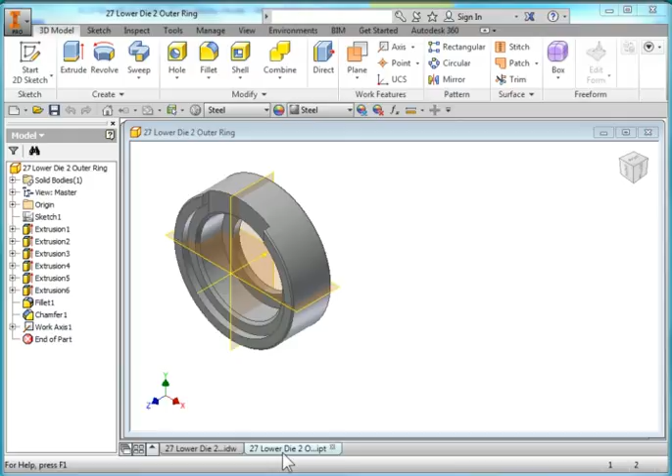In this video, I'm going to show you how to make this part and this drawing. It's part 27, lower die 2 outer ring, part of the button maker project, project 8.1. The part is shown dimensioned on page 18 of that document.

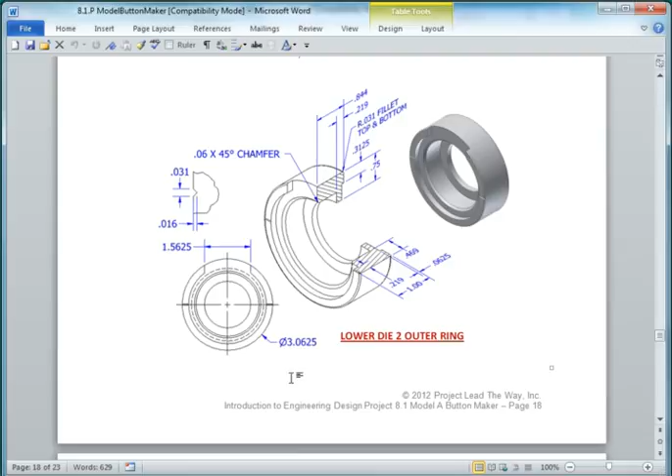I'm going to start out by creating a new part. Add a new sketch on the XY plane. Create a circle at the origin, and make that a diameter of 3.063.

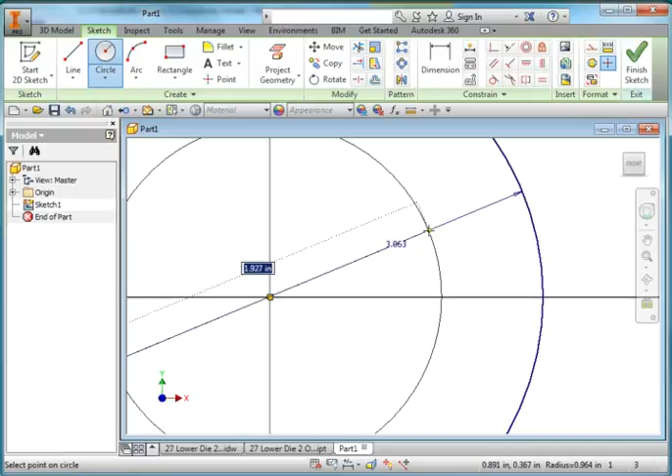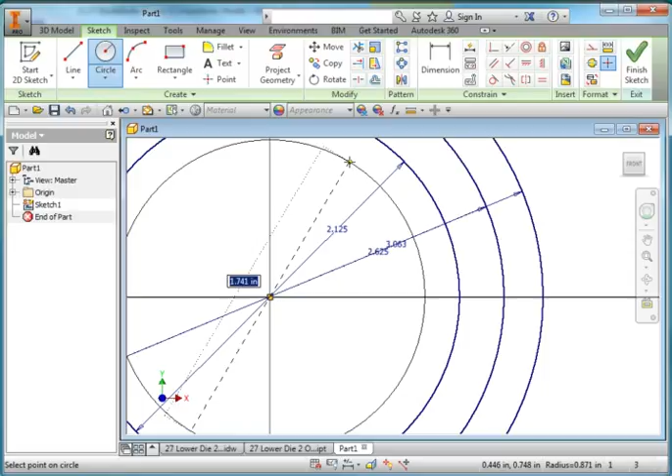Another circle also at the origin, with a diameter of 2.625. Two more at 2.125 and 1.563.

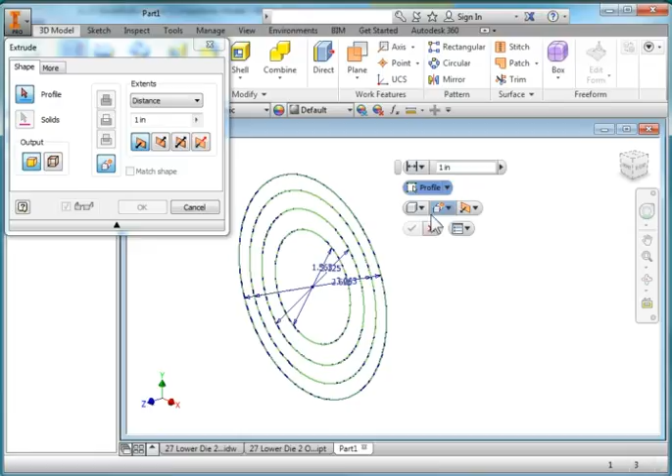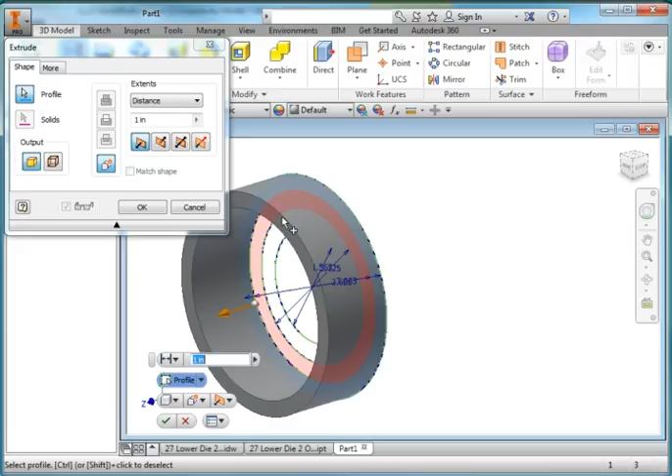I'm going to extrude out a distance of 1 inch. I'm going in the reverse direction, and I'm going to choose all these profiles. As a profile, I'm going to select all the diameters other than the middle one, and go out 1 inch in the reverse direction so I can keep the sketch on this top surface. Hit OK.

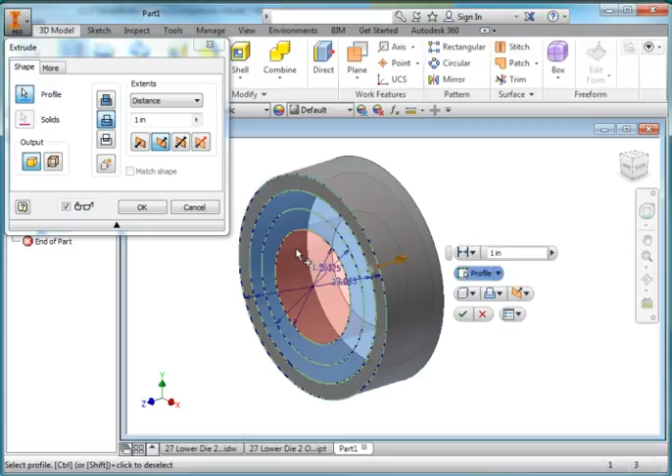I'm going to go to this extrusion, and change the sketch to turn the visibility back on. I'm going to extrude out, reverse direction, remove material, choosing these two inner profiles, and go in 0.156.

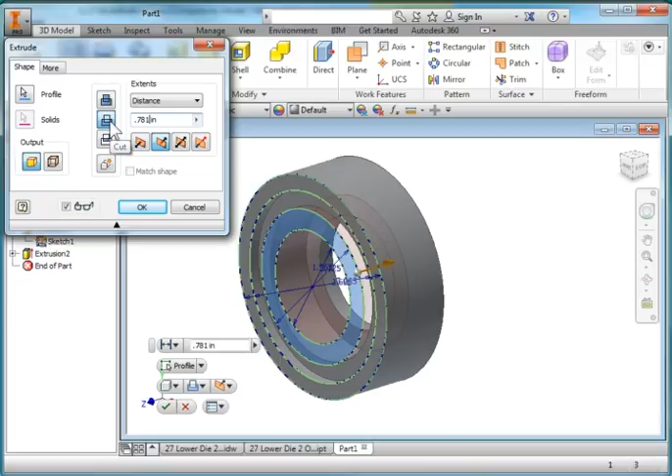One more time, I'm going to extrude by just choosing this inner diameter, remove material, and go in 0.781 inches. I'm going to come back to this sketch and turn off the visibility.

I'm going to go to my chamfer tool, and set the chamfer to 0.06, and choose this edge here.

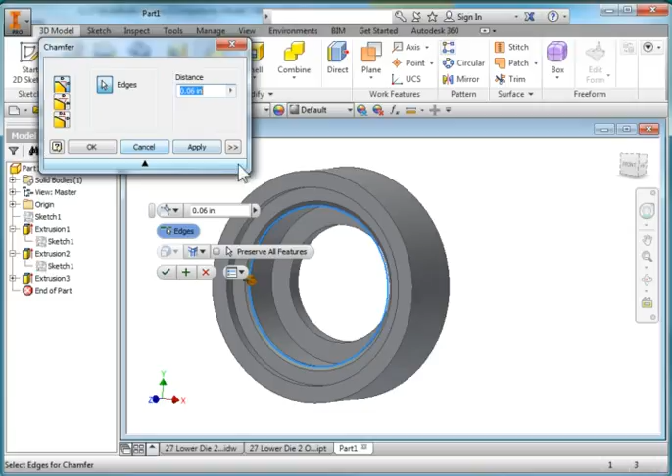I'm going to turn the part around and create a new sketch on this surface. Draw a circle from the origin and make that diameter 2.438.

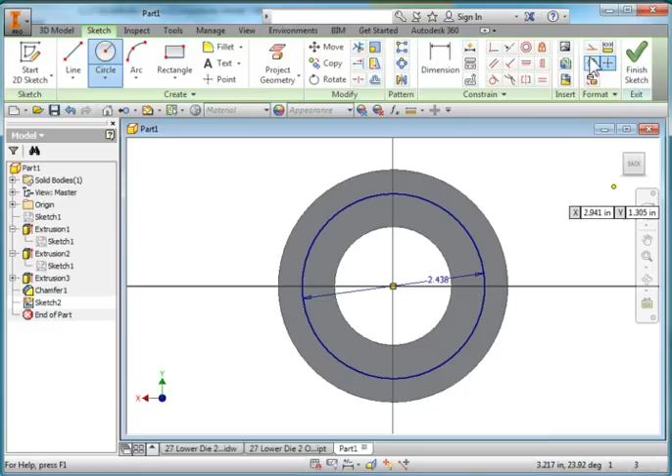I'm going to extrude, remove material, to a depth of 0.063.

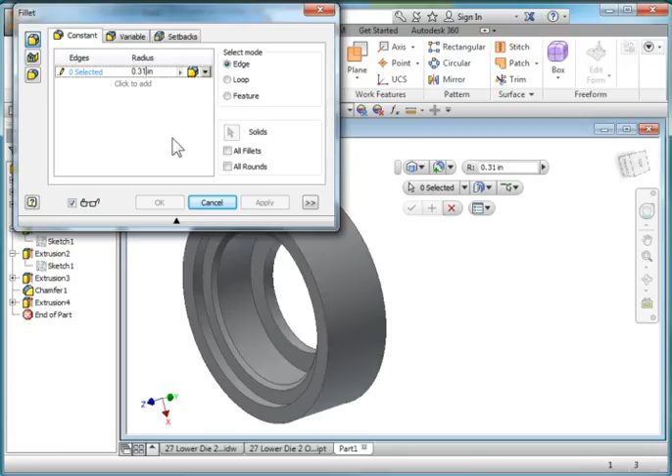I'm going to go to my fillet tool, and add a fillet of 0.031, at that edge and that edge, 0.031.

Going to go to my front direction. I'm going to open up my origin folder, and look for that plane. In this case, it's the XZ plane. I'm going to create a sketch on that plane.

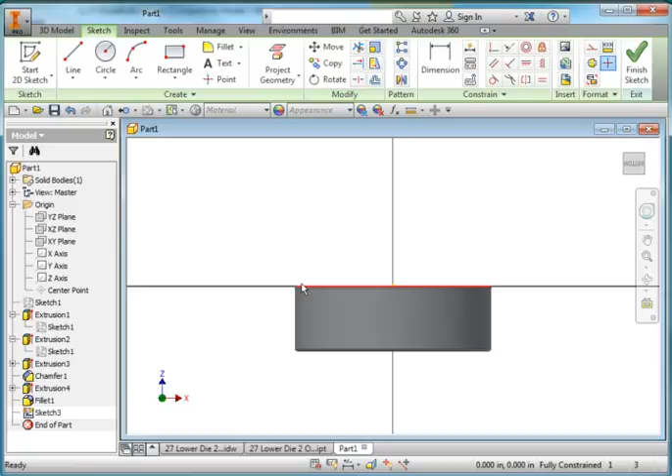I'm going to turn on Slice Graphics. I'm going to zoom in. I'm going to turn on Construction Geometry.

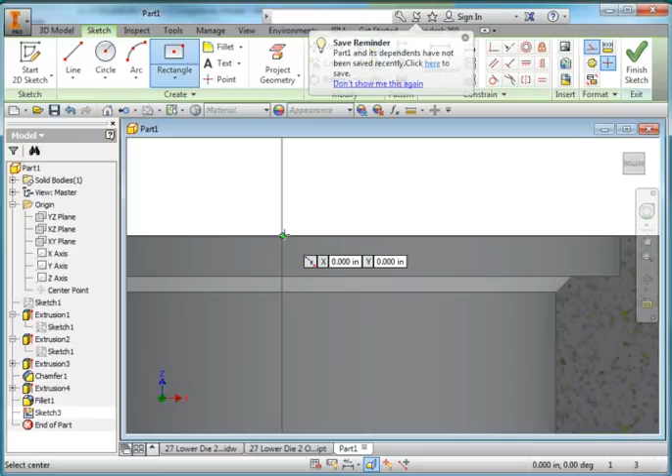Going to create a centered rectangle at that point and make the sides 0.031 tab, and this is 0.016 times 2.

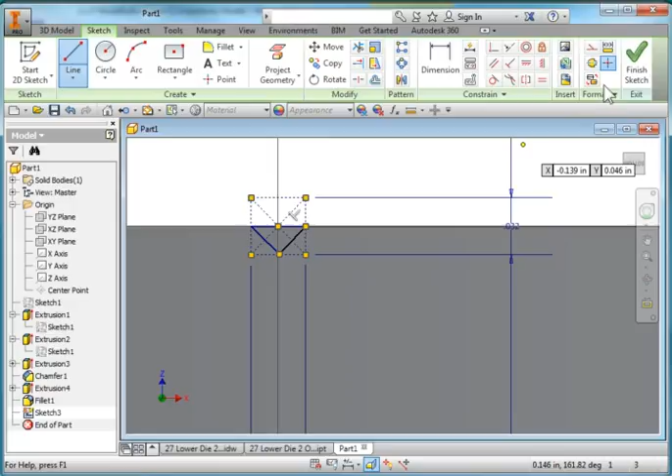I'm going to turn off Construction Geometry. I'm going to draw real geometry from that point to there, and then close the shape. I'm going to extrude in both directions, all the way, and remove material. Hit OK. If you zoom in, you can see the notch I just created.

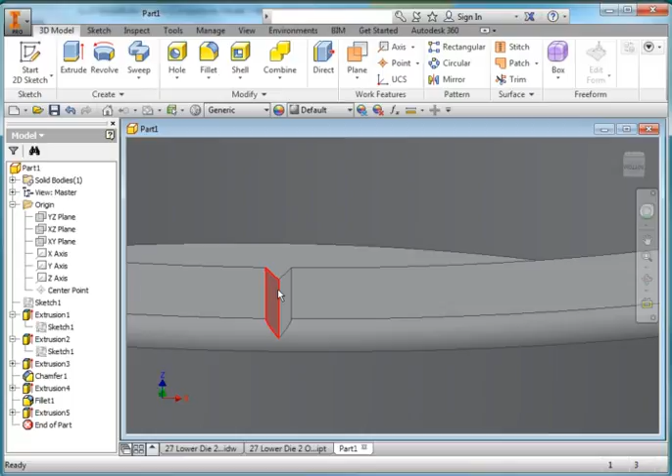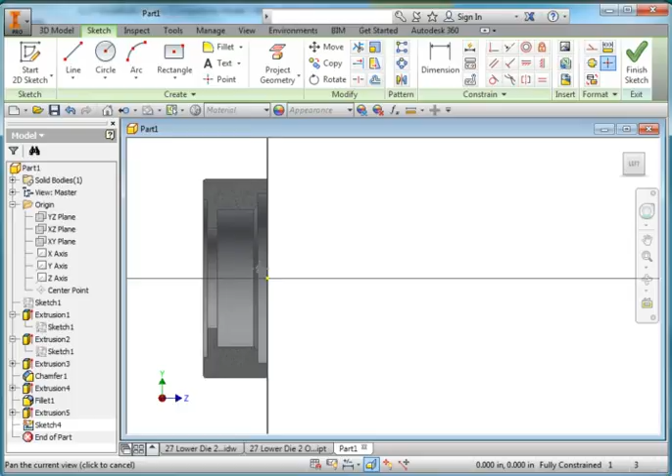Go back to my front direction, and create another sketch on this YZ plane. I'm going to turn on Slice Graphics, turn on Construction Geometry, and I'm going to...

Project cut edges, and I'm also going to project geometry. I'm going to project that edge there.

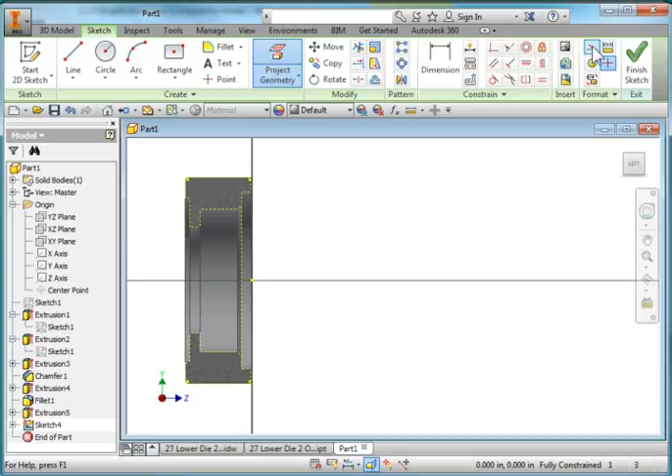I'm going to turn off Construction Geometry, and draw a centered rectangle. Make the width 1.563, the tab, and then grab this edge here.

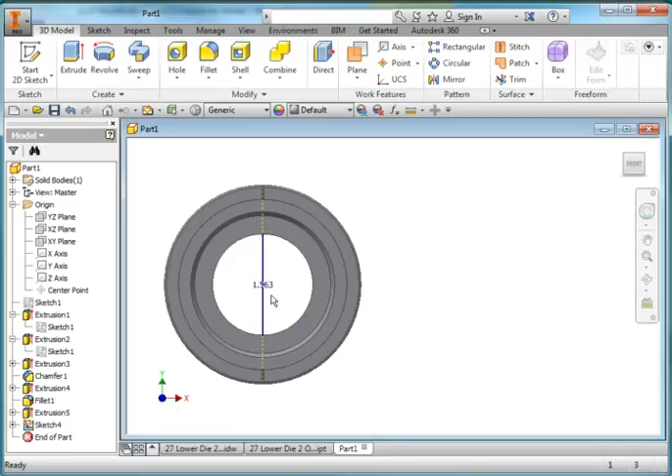I'm going to extrude out, remove material, but going in this direction, and go out a distance of—you can just drag this arrow like such to create the notch shown in the drawing.

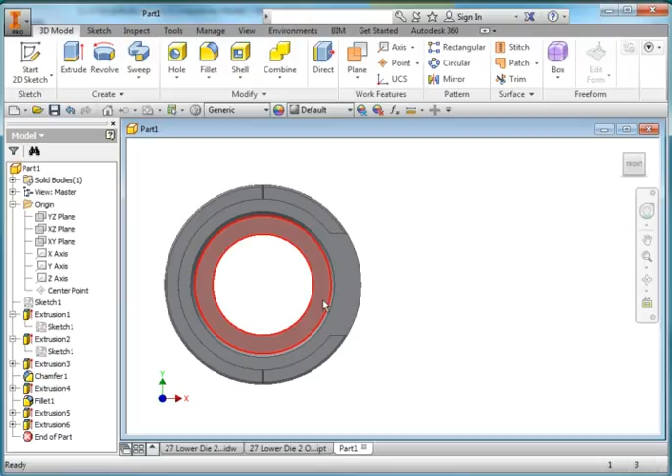I'm going to go ahead and specify the material. Using this pull-down menu here, I'm going to look for steel alloy. If it's not there on the pull-down list, you may have to go over to the iProperties menu, right-click here, go to iProperties, and look under Physical, and you may have to look for it there.

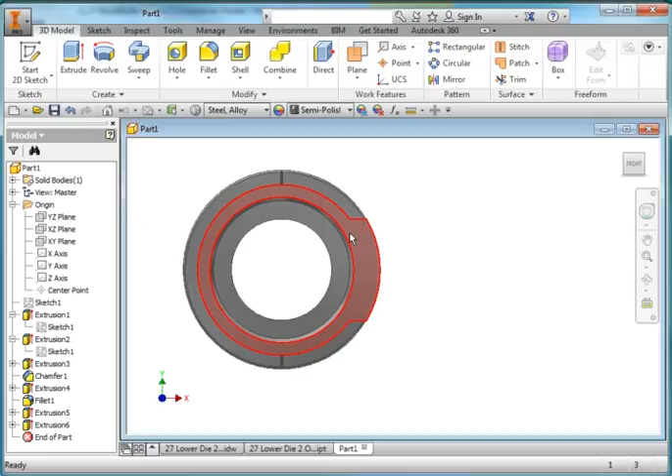As one last step, for purposes of assembly, I'm going to add some work planes on a centerline axis. I'm going to go to my planes and offset plane, and come over here to my origins folder and look for that work plane. Set that at 0.

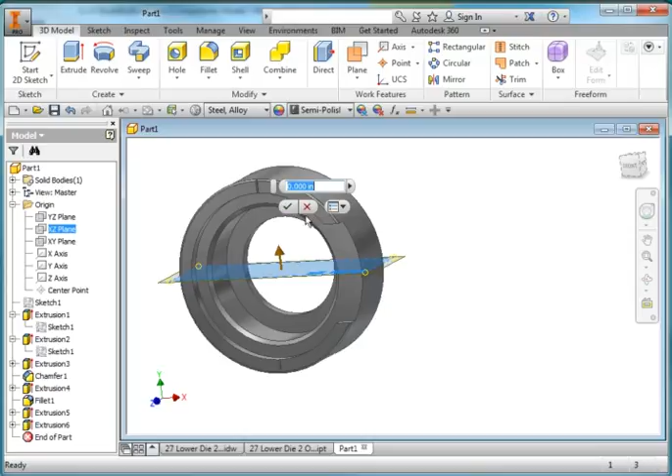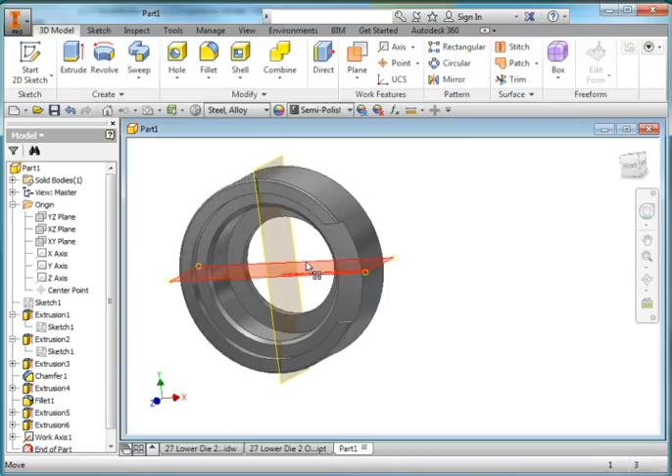And do it again. Offset plane. Specify this one, set it at 0, and I'm going to create an axis, using the intersection of two planes, pointing to the two planes I created. I'm going to grab that axis, and extend the lines out a bit.